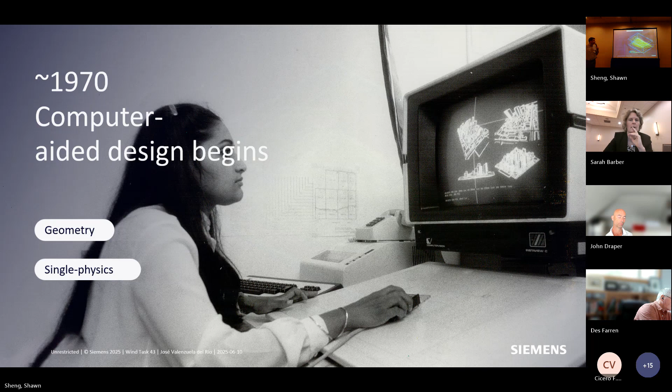Fast forwarding to the 80s, that's when we have the rise of computer-aided engineering. A couple of changes happened, again based on the great advancement of computers. The first was computer-aided design models, the geometry models we discussed started to be a little more flexible, able to cover more decisions, and you were able to reuse some of the models.

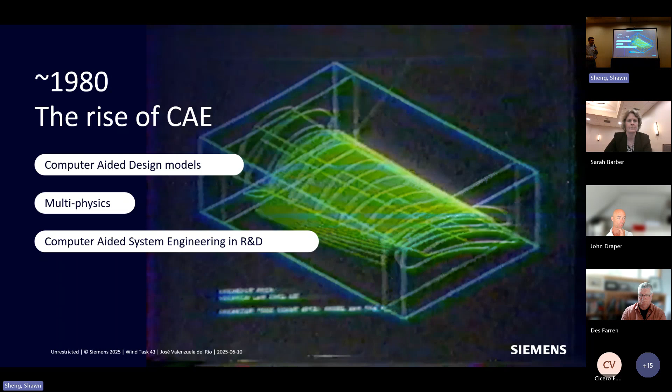When it comes to physics, engineers and researchers started to co-simulate different simulations, so you were able to analyze your products more properly. The increase of memory and clock speed on computers also allowed engineers to focus not only on components, but on systems, because they now had enough memory to cover the systems.

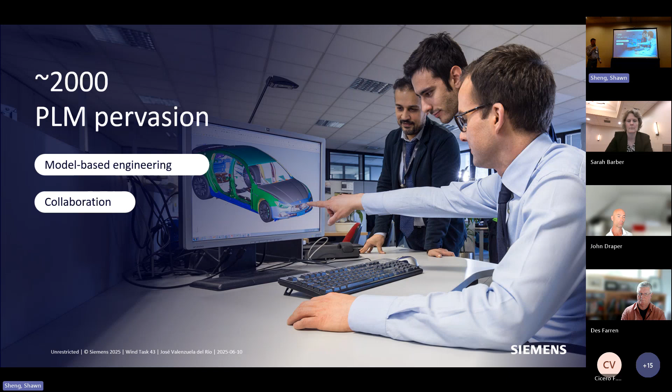Fast forwarding to the 2000s, hopefully everybody here was already alive at that time, we have the product lifecycle management revolution. Think about product lifecycle management, where you start to connect different models from design into commissioning and into manufacturing, so companies started not to be silos but to be more connected. This increased product performance, as well as traceability and other aspects useful in the future.

Now, what I came here to present: the digital twins. Here we have three additional ingredients from the ones I mentioned before. The first is real time, and for real time there are two aspects. The first is simulations, all the finite volume and finite element methods developed in the past, which became faster due to continued increase in computer power. More importantly, AI has been able to support and push some of these models into reduced order models, so you could have real-time assessment of your products.

The second part of real-time is being in sync. All the 5G and, in the future, 6G connectivity allow sensor data to be immediately available to the simulation models, so you could actually sync your models to your actual asset. This is very important to have a digital twin that really represents the actual physical asset.

The second ingredient is anything as a service. With cloud technology, we're now able to offer a lot of things in terms of subscription to our customers. Finally, the product lifecycle management we mentioned before, which connected design, commissioning, and manufacturing, now with the digital twin era you're able to extend throughout the whole lifecycle, including operation.

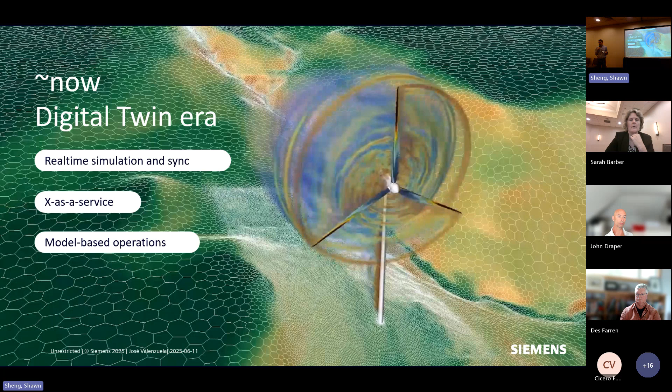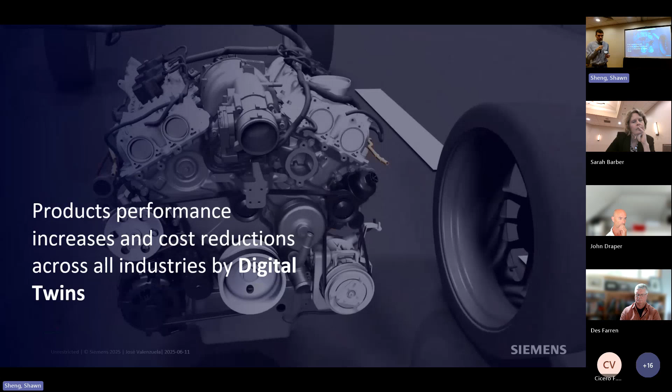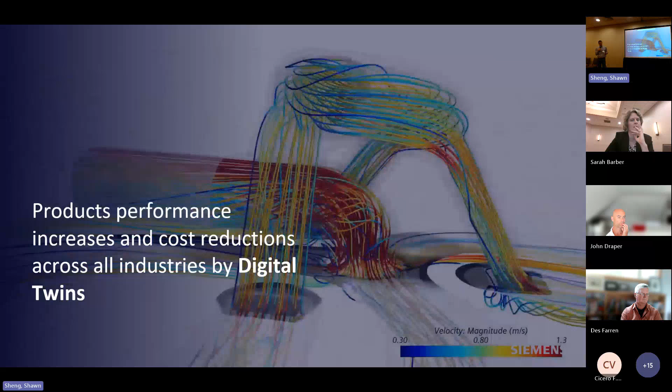With digital twins, what are we able to get? We're able to increase performance across all the different industries we serve, and also reduce costs, mainly because we're able to play games virtually before doing anything physically. Whenever you do things in the physical world, you can break equipment, you can have safety issues with your workforce, and obviously it's very costly, because you need to pay for hardware in advance that might break, and also devote a lot of time to set up experiments.

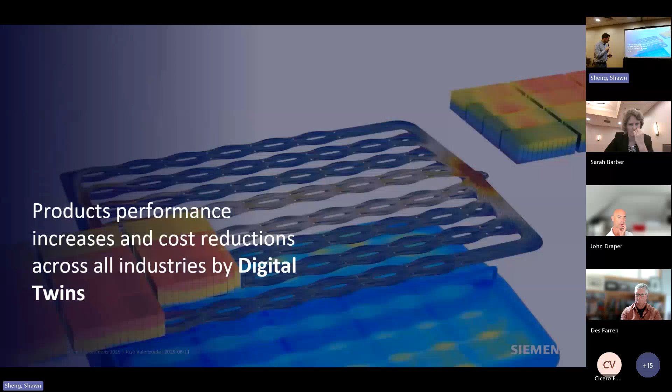So here are a couple of examples that we did specifically for the wind industry. The first one is about wake blockage and also the terrain influence. We have a customer that had a wind farm, and they were not able to produce as much energy as they thought. So they thought the issues were the wake blockage and the terrain, the orography.

So they decided to work with us to do a digital twin of the farm. We made sure that this time we modeled the wakes and also the orography of the farm location. You can imagine this was a very expensive model, not real time, because there were a lot of cells there.

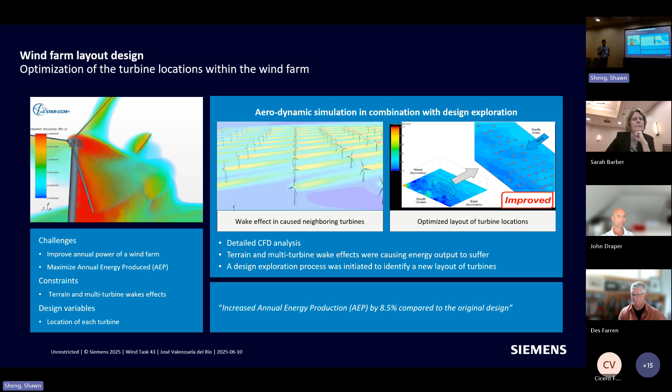But then they were able to match, with this model, the actual output they were getting. And then they started to think about what to do for the next farm. They started playing with design optimization, trying to change the different locations of the turbines so that in the future they can make the most out of it.

Second example for wind energy is about a supplier of floaters. They were quite active in the oil and gas industries, on the deep sea platform. They wanted to get into the offshore part of it.

We had a similar study where they wanted to have a virtual model so that, whenever they design updates, like going from the oil and gas to the wind turbines, they would be able to do it fast and in a short time.

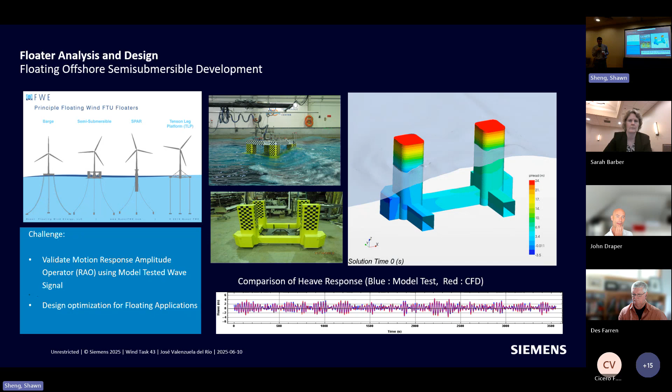So again, they built a virtual model, and then matched the response with the actual test bed that they had. Once they had it, they started to play with how to change the geometry, how to change the materials, so that they were able to provide the new market that they wanted to show.

And here, the last example, which is about in-service operations for wind turbines. This is our executable digital twins. You guys might have seen that already, but the idea is that you have this simulation model that is hybrid in the sense that it has machine learning on it.

It's a reduced order model, and it was connected with the sensors for this instrumented blade. Whenever you were exciting the blade, the sensor information was used to tune the actual simulation model. Automatically, not only do you have readings at the limited locations where you have sensors, but you have readings across the whole domain of the blade.

So you can imagine this is going to be quite useful. First of all, you don't need a lot of sensors to be able to observe what's happening in the full blade. Second, each blade is going to be different because each blade is informed by its own sensors, meaning you are able to track the degradation of each blade because they are tuned based on the sensors.

And more importantly, they self-update because the stream of sensor values changes every time, so you are able to stay up to date with the blade degradation.

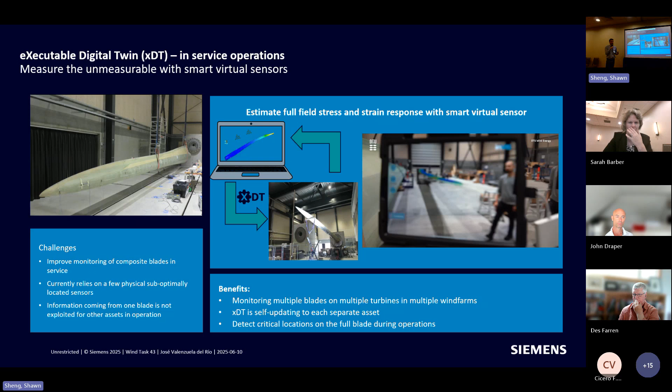Now that I've shown you the digital twins and a couple of applications, how does it help with digitalization? Here we have a framework that we call the Sustainable Digital Enterprise. You can see that at the core of it, you have the digital twins of the product and also the digital twin of the production.

So these digital twins complement the physical asset. You are able to augment the data that you have from the physical world. So more data and more quality, we get into more detail for that.

Also, we have what we call digital threads, which are the next generation of PLM, product lifecycle management, where you are able to build a framework that seamlessly connects your product with your production throughout all the life cycles of the two of them, and wherever they relate to each other. In that way, you are able to leverage all the physical data, connect it to the digital data, and make the most out of it.

And also, I'd like to capture your attention on this external part, what we call the digital world and the real world, which are basically the context where your product and your production operate.

So you can imagine that you might have a product, but it might be in different locations, in different geographies. You might have constraints from the supply chain management and things along those lines. That's what we are trying to model with this digital world. Let's get a little bit into those. So for marketing purposes, we also call it industrial metaverse.

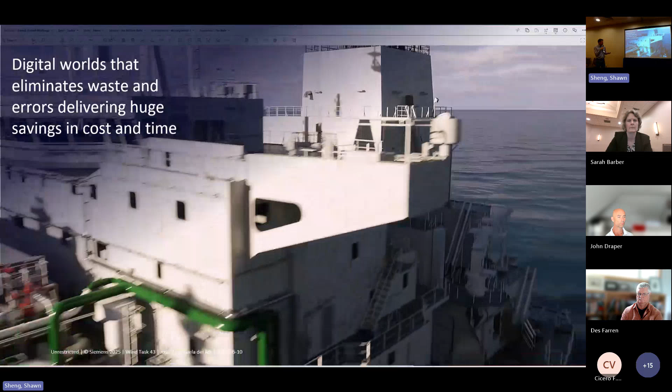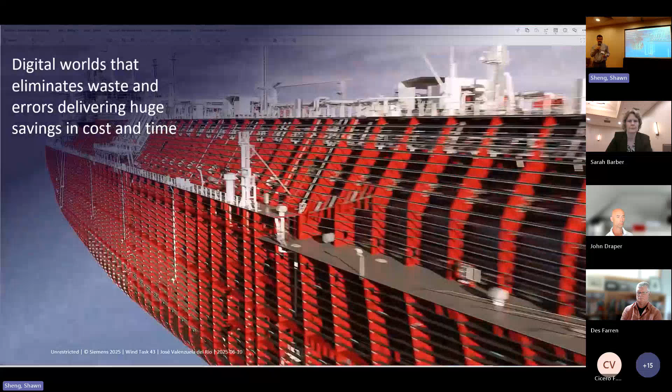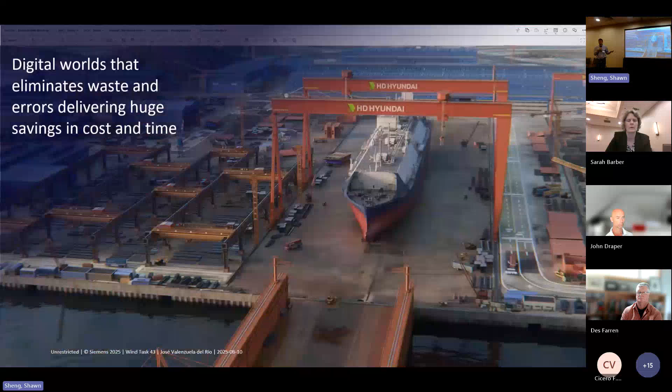But here, what you see is that you not only see the digital twin, you also see the context around it. So the first thing that I would like to capture your attention is that everybody can visualize your product here. It could be photorealistic. So if you have any computer vision technologies that need to be trained upfront, you could use this digital world to train your computer vision techniques. You don't need to wait for the product to be built to do that.

Then the other important thing that you can see here is that you could interact with your digital twin. So if you are any decision maker throughout the product life cycle of the digital twin, you are able to change your decision, and everybody else is going to see what's happening, right? And people see the real world. It's not that you need to have training on a special tool to be able to interpret what's happening. Here you see the rendering of the real world, and the barrier for people to get into that to collaborate is very, very low. You don't need to use any specific tool.

And finally, the most important thing is that these digital worlds are connected to your physical world, right? So whenever you make any decision on what to change, you do it with your virtual world, but then eventually you would download it to the physical world.

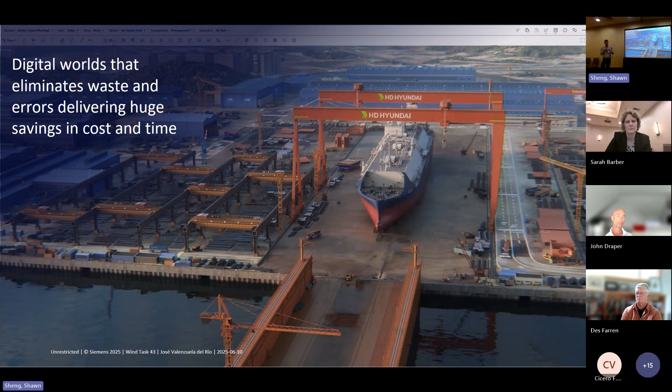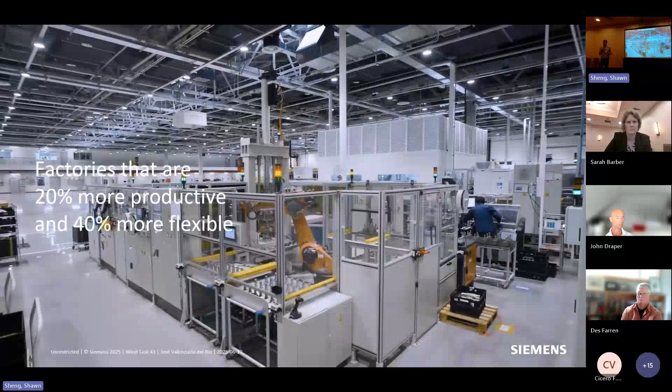This is another example, not only for the product, but also for the factories. In this case, same thing. If you have a factory and you want to change from manufacturing of one platform to another platform, you could experiment the change virtually without disrupting your actual production. Then play games, change the layout, change the tunings of your machines, and whenever you optimize it virtually, without having to stop anything on your physical factory, then you deploy, and immediately, with very limited testing, you are able to optimize your plant for the new platform, or for the new schedule that you want to have, because you might also have issues with the schedules.

Then thinking about the future. So I guess a keynote nowadays cannot be done without talking about Gen AI. So how is Gen AI going to disrupt the digital twins, and what are the opportunities for the digital twins? So the main question here that we want to answer is how the success of consumer AI could be translated as a success for industry AI. There are a couple of differences, right?

Because in consumer AI, hallucinations don't have a lot of implications, right? So if you get a recommendation from Amazon and you get a book and you don't like the book, after 3 pages, you just stop reading the book. Or in Netflix, if you get a TV show recommendation that you don't like, the worst thing is that you just lose 30 minutes of watching the first episode.

But for industries, it's totally different, right? We are talking about, most importantly, the safety of your people. So this could have implications. If you have a hallucination in an industrial application, this could be very, very hard. Obviously, you could destroy your equipment, a lot of money, and also your reputation. So taking care of hallucination is very, very important.

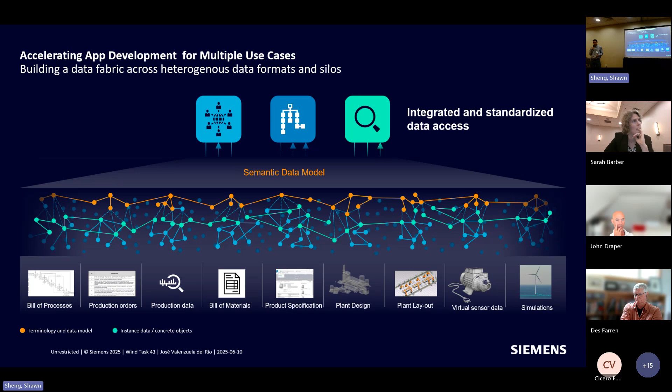And based on that, we build what we call the industrial copilots. You might see that we are talking about industrial foundation models. I guess this would be a topic for another keynote, but we are assessing whether it makes sense, since in engineering the modalities are different from text or image, which are the main modalities of the existing foundation models. So the idea is that if we want to bring simulation, geometry, visualizations, all of that might not be nicely covered by the current language models or image models. So we are assessing whether it makes sense to have our own industrial foundation models.

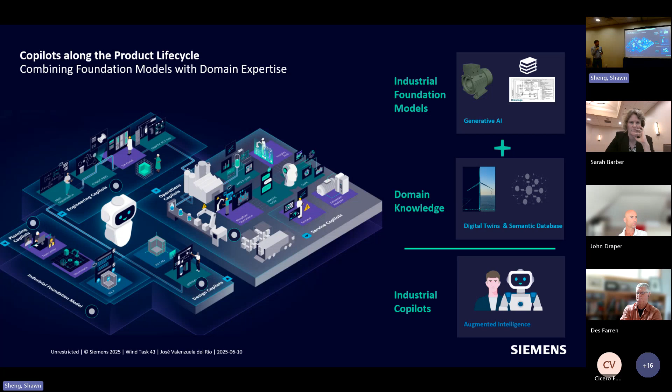Let me show you some of the copilots that we are putting together. This is the design copilot. This one has the capability of a chatbot, where it's going to help new users to answer questions based on documentation, but also it has some of the characteristics of a copilot where they are able to do small things for you, like changing geometry or doing small reports. Let me play it for you.

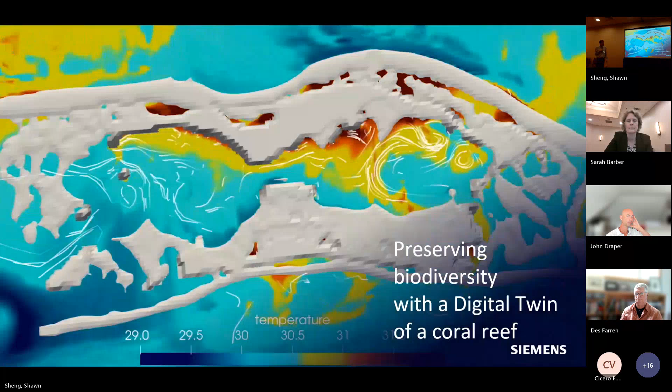All right, and with that, I close the keynote. I hope you liked it.

We have a question from the audience, from online. Anna Maria, you asked a question quite a long time ago. Do you want to ask it? Because I'm not quite sure what it was referring to, because it was near the beginning of the presentation. Can you speak, Anna Maria? So Anna Maria asked how much the simulations cost in terms of time and money, but I don't know exactly which simulations you were referring to at that point. Do you want to? The digital twin simulation. You answer that question? Maybe we could get to Lindsay. So,

Yeah, perfect. Yeah, thanks for the question. Which simulation? The CFD for the farm? I was looking at this ship with the container and how it works, because they say that you can know how the design works when looking at the digital twin. But how much does this cost in terms of power, for example? For the ship, right? For the ship that I showed. But that's one example. It was done for HD Hyundai, right? So this one.